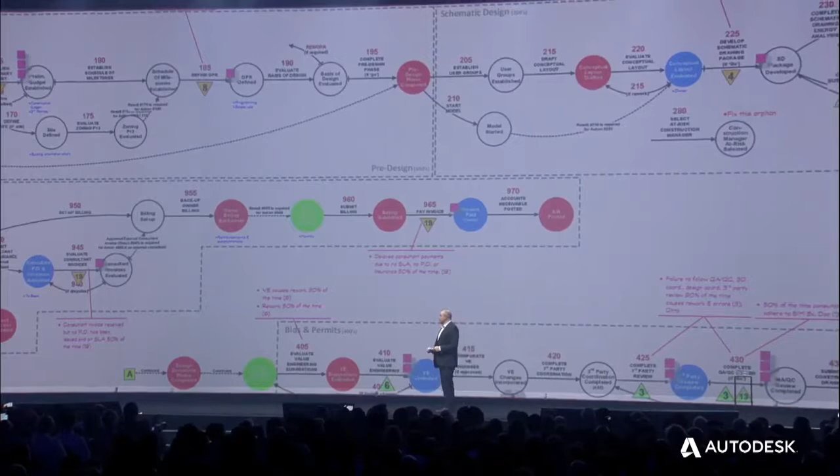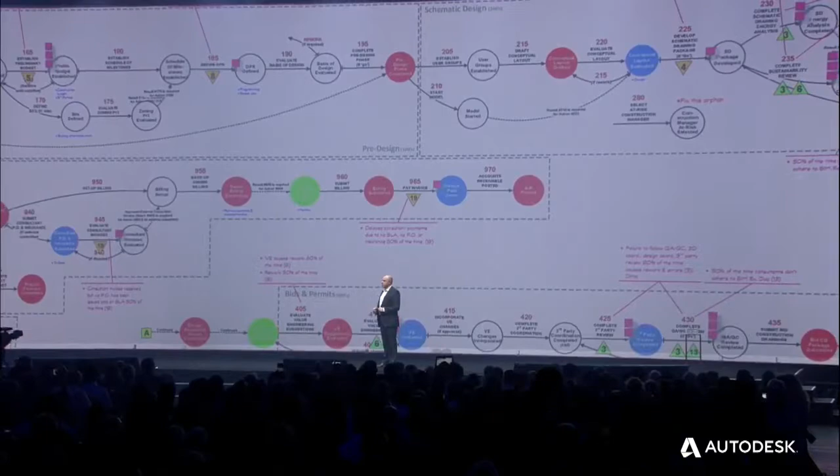Why is that? When you look at the process to deliver a complete project, it's no surprise. Come on, look at that, right? Our friends at the Beck Group took time to illustrate just how fragmented and complex it is. So how can we possibly create more and do it better when we are managing so much complexity? An app for that is not going to help. Software that fixes one piece of the process at a time is not the solution.

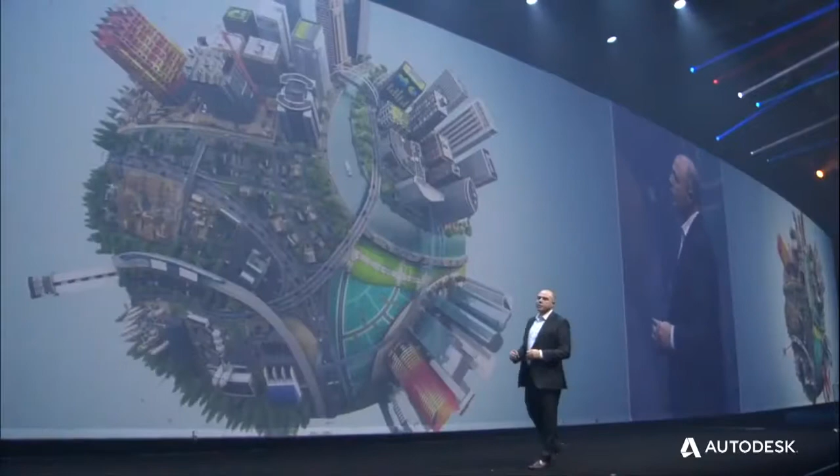The benefit of automation relies on connecting the data, the people, and the processes. Data has always been central to the promise of BIM. We hear you when you say that you want to work in more connected ways across teams and time zones.

When you add the power of the cloud to BIM, that changes everything. Connected BIM is BIM plus the power of the cloud. Let me say it again, it's important: Connected BIM is BIM plus the power of the cloud. And as Amy Bunzel said yesterday, we are working with you to put data at the center and help you connect the digital and physical aspects of your projects.

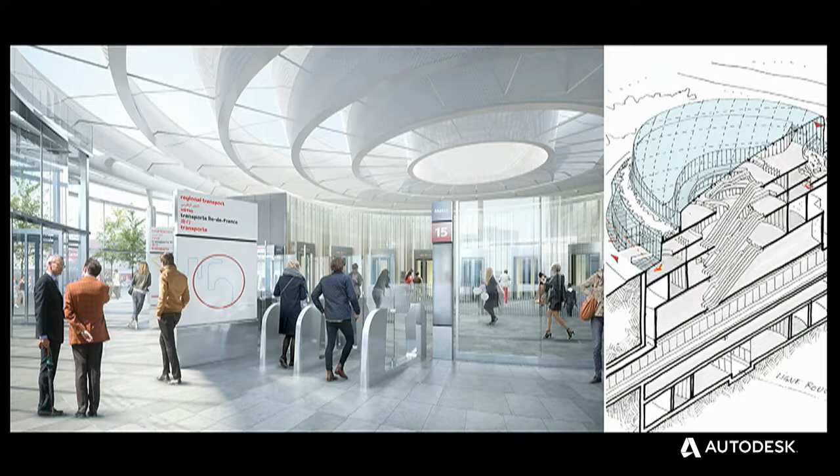I want to share with you 2 brief examples of how your colleagues are using BIM in more connected ways. The Grand Paris Express project is one of the largest infrastructure projects in the world. It will create 200 kilometers of new railway network with 68 new train stations, and 90% of it will be underground. It's one of the first infrastructure projects of this scale to use BIM from start to finish.

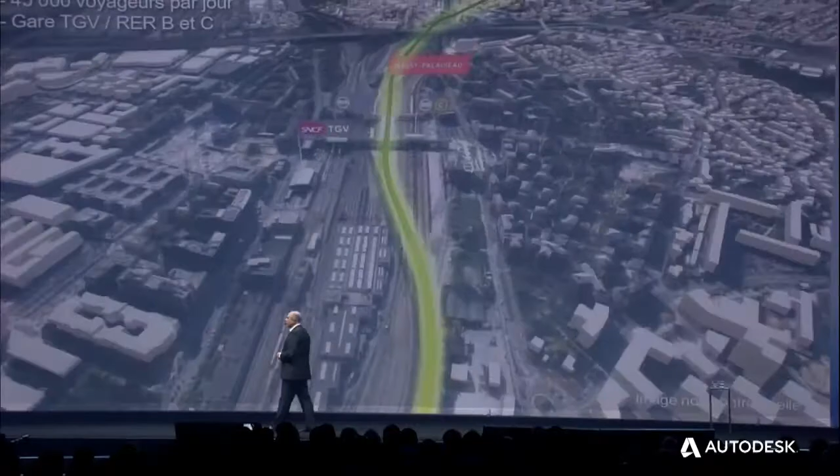37 architectural and civil engineering design firms are participating in the project, and they are all producing horizontal and vertical infrastructure BIM models together using Civil 3D and Revit. They optimize their design by simulating things like smoke extraction, escape routes, and optimal equipment locations. Better collaboration across all stakeholders is keeping the project on time and on budget.

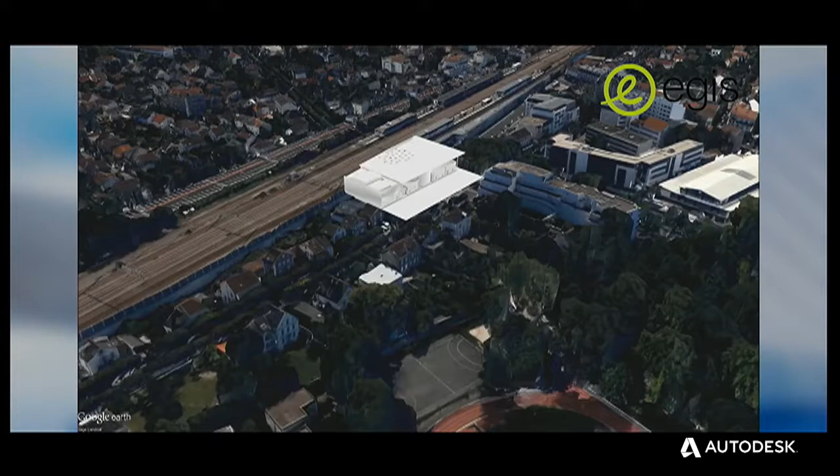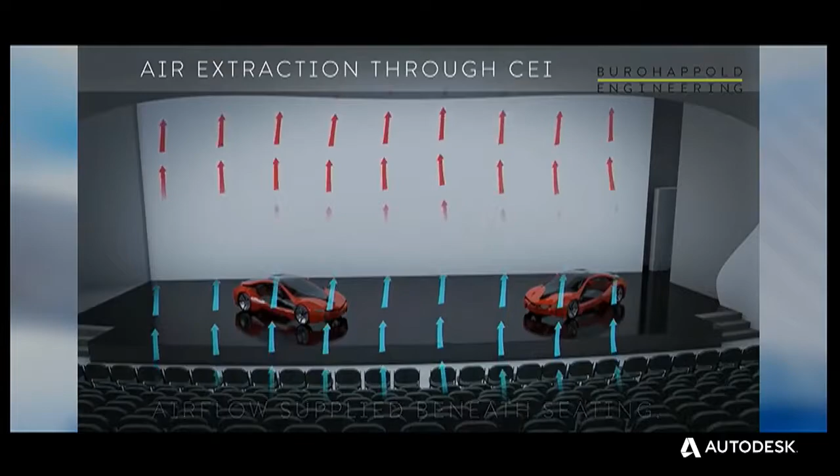Or take this amazing building in Dubai, the Museum of the Future, which is integrating digital design and construction to push the boundaries of what's possible. They actually won the first prize of the AEC Excellence Awards this week. It's an amazing project. They are using fully developed digital workflows across the project lifecycle to support the LEED Platinum objective, and they are using cloud-based tool technologies for energy, solar, daylight, and ventilation analysis.

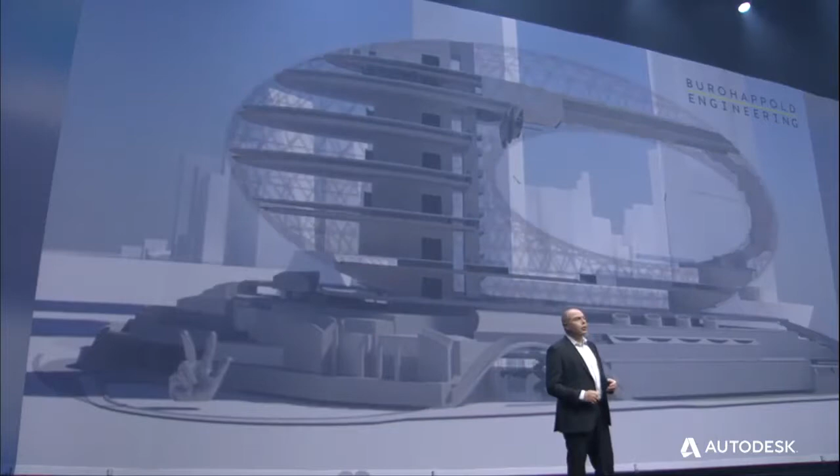In addition, with design for construction built in the Revit-based handover process, plus the use of BIM 360 Field in the field, a 65% reduction in rework is projected. 65%.

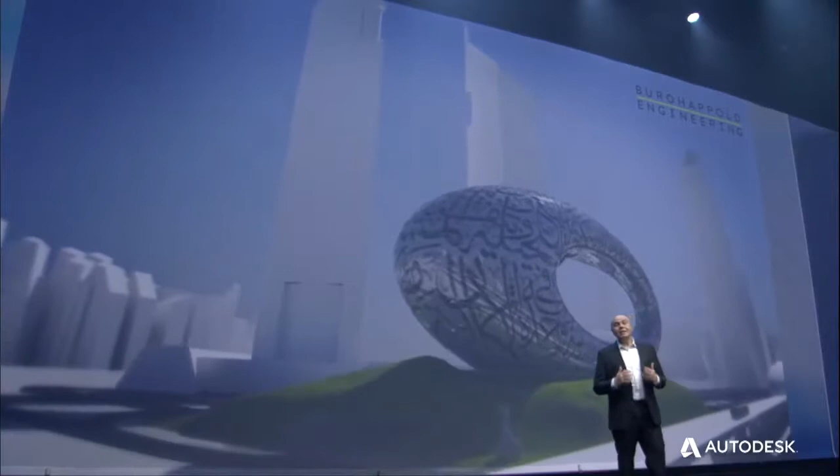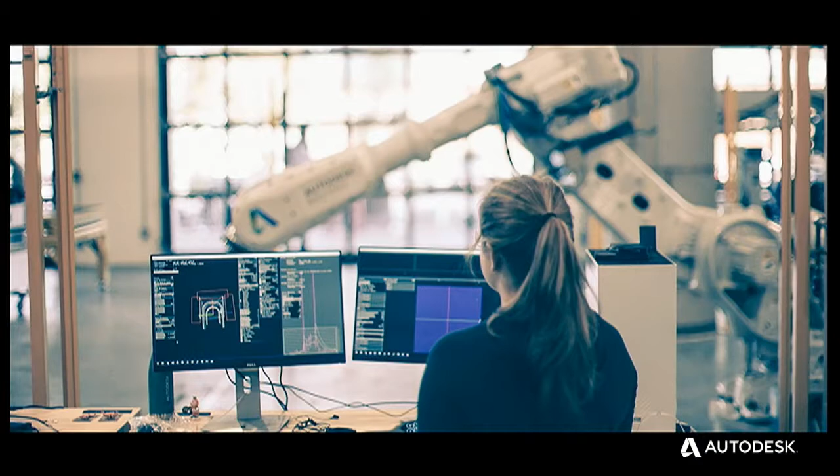So what's next? How does data enable us to work smarter? Remember, data feeds automation in ways such as machine learning and artificial intelligence. Automation augments our human capabilities. It is changing the way we work, and there is so much we can do. It's worth repeating: we can do more and achieve better results with less negative impact.

Take generative design as an example. You describe the optimal outcome, and the computer explores thousands of potential solutions for you.

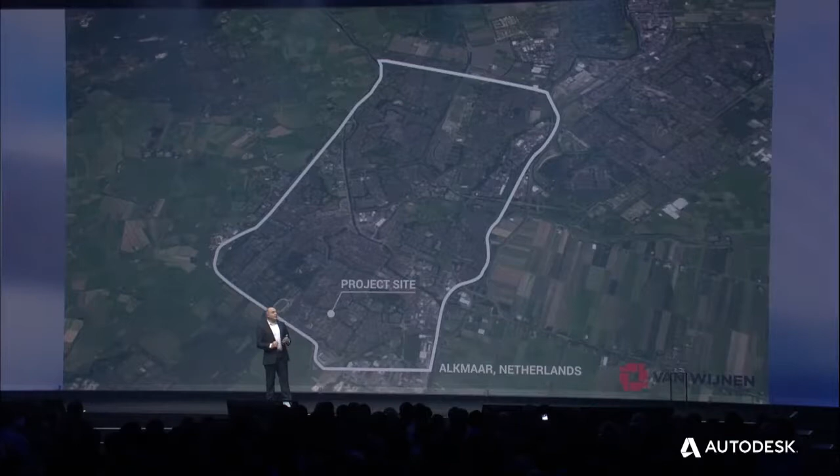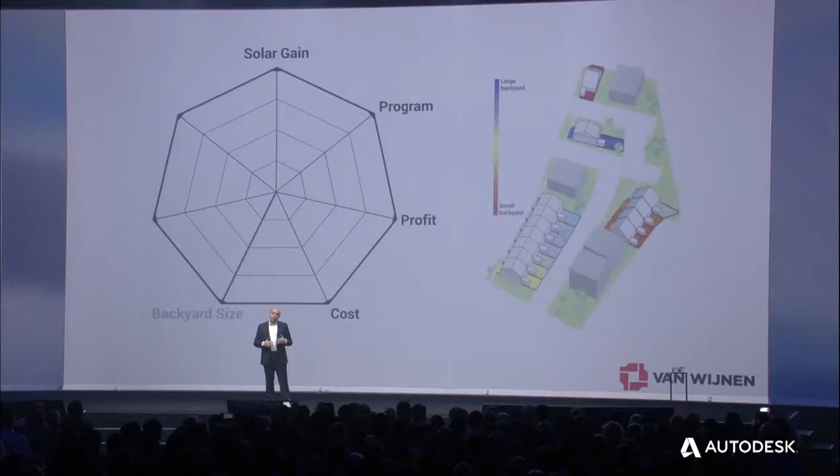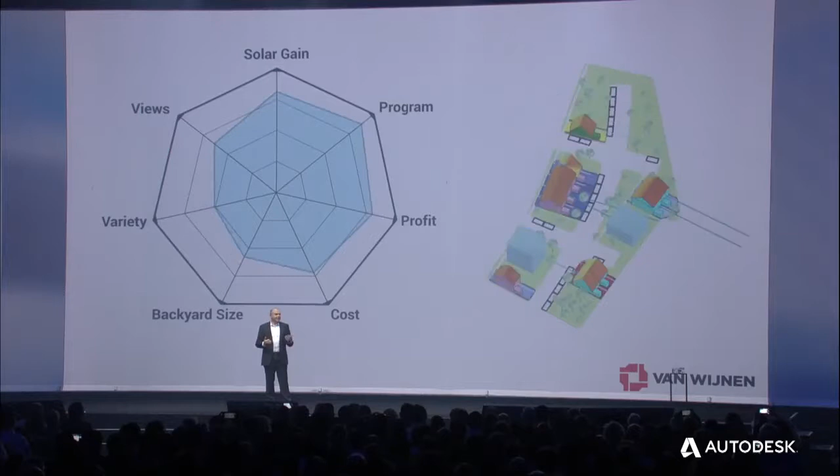On Tuesday, Hilbrand Katsma from Van Wijnen talked about this. Their land development example looked at an urban neighborhood and set performance criteria like backyard size, sunlight access, and views. They also set business criteria for the land developer like cost of development, quality, and time to market. Then the software went to work, testing and learning from each iteration what works and what doesn't, in order to come up with several options that provide the optimal solution.

In this real-world project example, Van Wijnen leveraged generative design to help them build more housing, at the same time meeting their own business objectives.

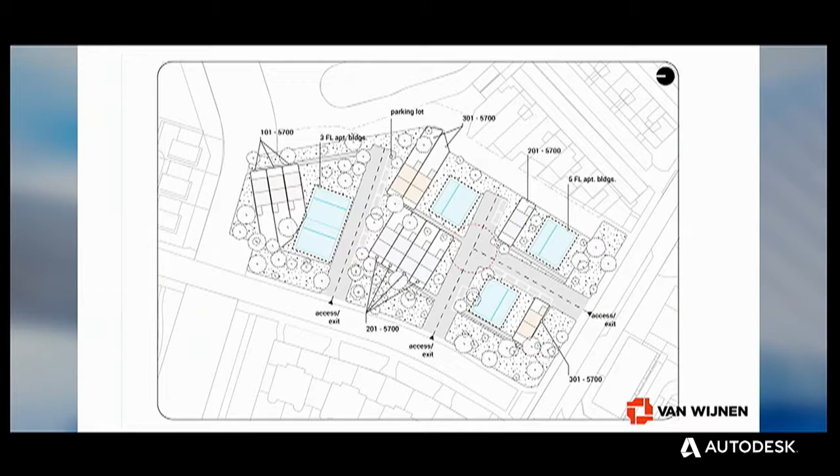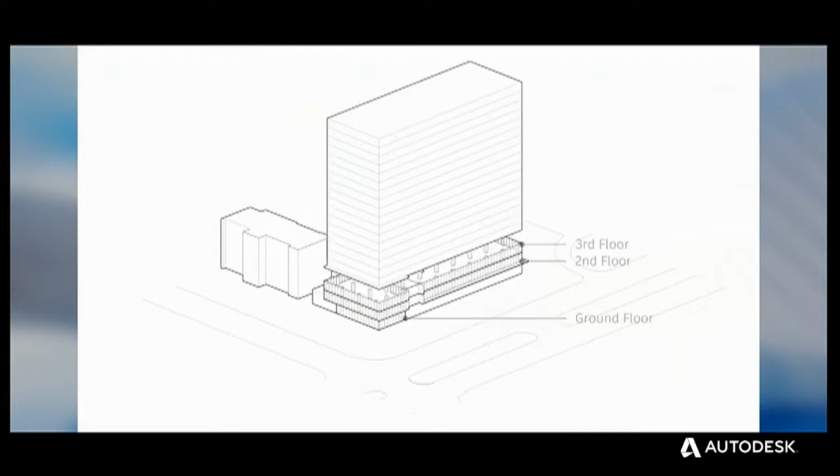At Autodesk, we tested the application of generative design to help us better optimize space in our Toronto office renovation. We surveyed our employees about their preference for collaboration space, lighting, acoustics, and distance to the kitchen, and sometimes distance to the bathroom.

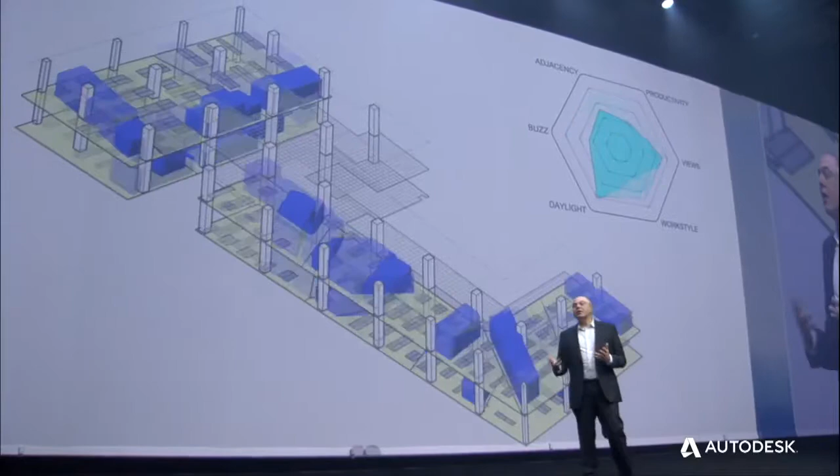Then we fed that criteria into the artificial intelligence software. You can see the process running as different floor plan layouts are being created. With this type of automation, infinite compute power augments our ability to design a better space to the delight of our employees.

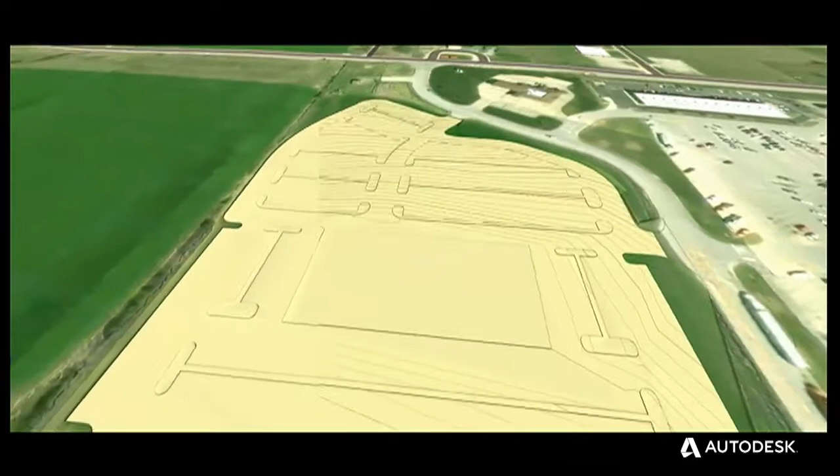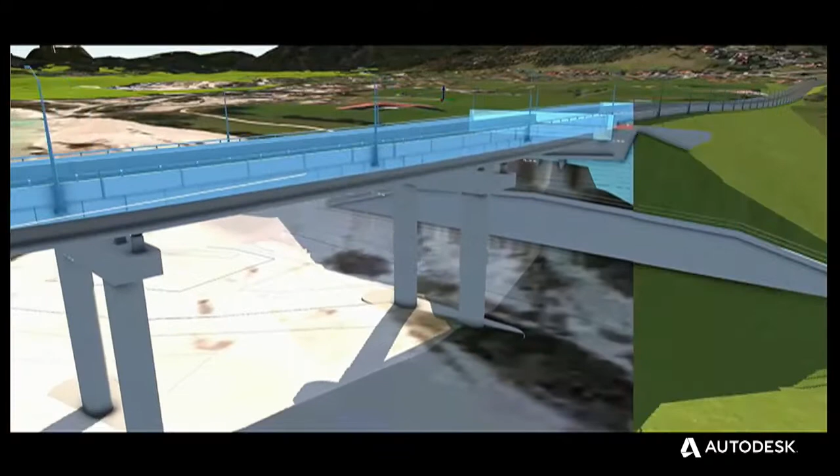We can also apply generative design to civil engineering. Grading on infrastructure projects can be complicated and require many time-consuming tries to achieve the best results. By analyzing the shape of existing ground and applying geometric constraints, hundreds or even thousands of solutions can be tested without even breaking ground. This is an example of how generative design can support low-impact development, so we have a less negative impact on the environment. I wish I had that when I was practicing civil engineering.

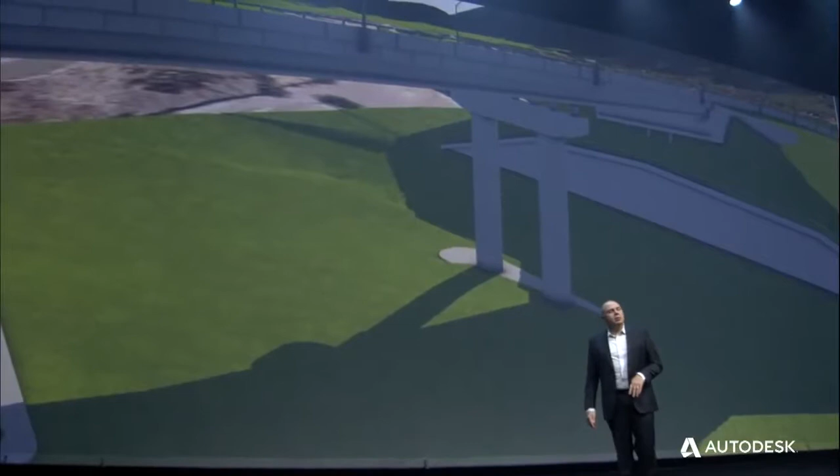All of these examples take place before construction starts. So how can machine learning help us on the construction site? Ask any contractor what their number one concern is, and it is always safety. Connecting machine learning, the Internet of Things, and BIM-based analytics are helping contractors to address safety concerns.

Construction sites are generating more photo and video data than ever before. Smartphones, tablets, site cameras, and even drones continue the explosion of visual content. SmartVid is using machine learning to turn this visual content into an opportunity to improve safety.

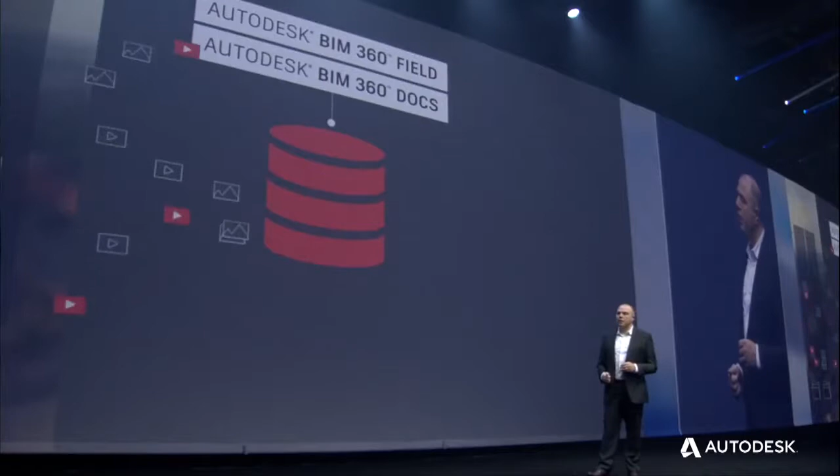In less than 90 seconds, you can connect your project data from BIM 360 Field and BIM 360 Docs and start mining it for safety insight, like, for instance, flagging missing personal safety equipment. You can use the results to reinforce safety protocols during your daily project meetings on site.

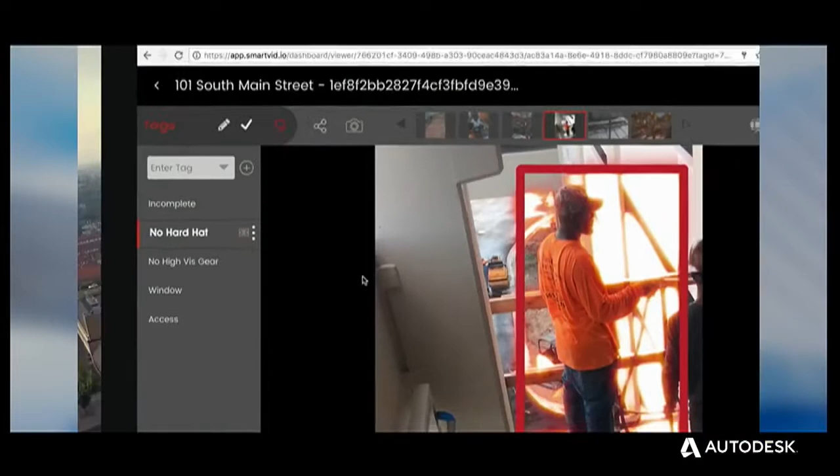We see SmartVid as the future of construction, and we recently invested in them so that they can accelerate this kind of innovation.

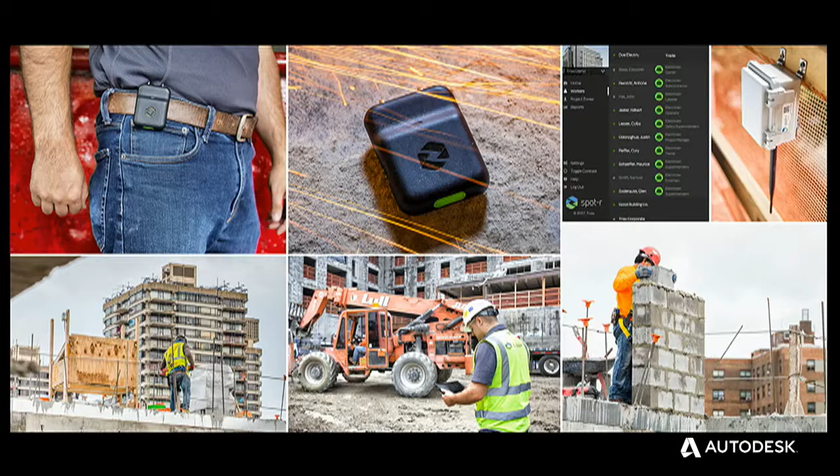Here's another example. The Internet of Things is helping contractors to build more safely than ever before. Autodesk is partnering with Triax Technologies to address safety challenges on site with wearable sensors that collect and transmit workforce and safety information in real time.

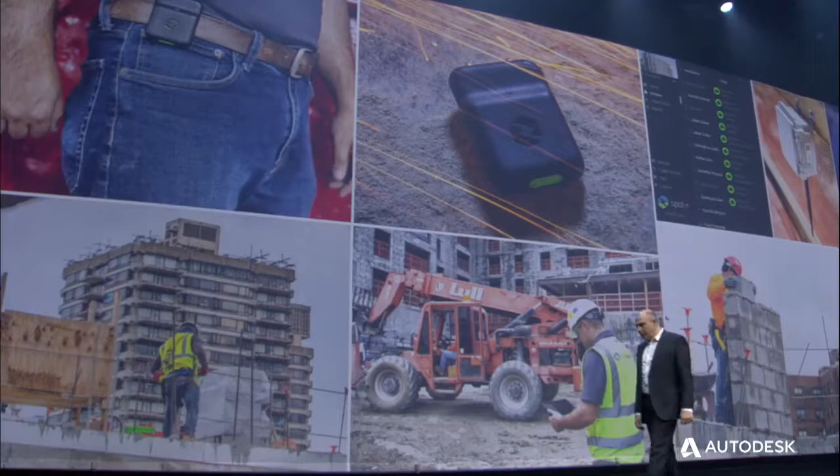If a worker slips, trips, or falls on the job site, sensors detect the incident and send an automatic alert to site personnel. The notification tells you who, when, where, and how the incident occurred, resulting in faster and better response to injuries.

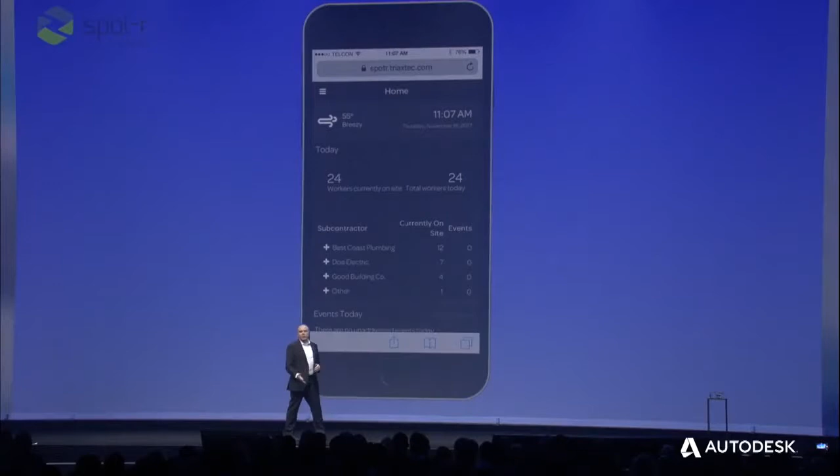And what if a site needs to be suddenly evacuated? In their product Spot-r, an evacuation alarm is triggered, and supervisors can track evacuation progress in real time.

Now, consider the potential of this workflow in the context of a Revit model that's hosted in the cloud. BIM visualization could help supervisors in locating precisely workers who've had an accident.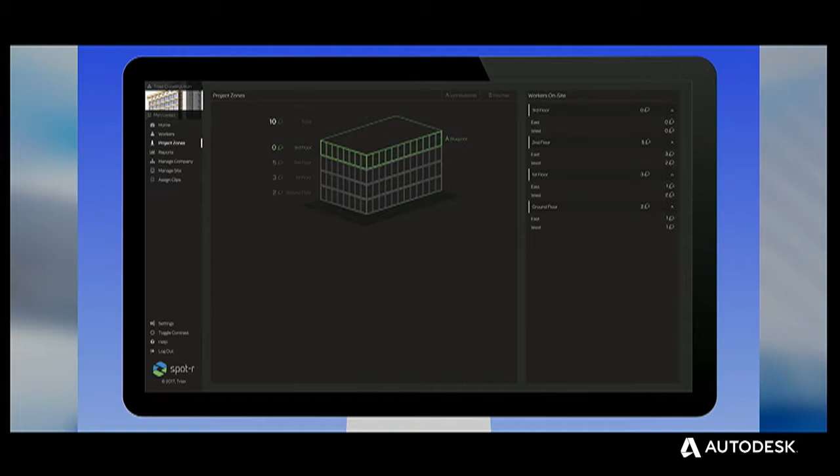We've said it, the value of the data is in the connection. What if we could take data coming from multiple sources like sensors, cameras, IoT devices, or any place across the project and visualize them against the palette of a building information model? Think about it. We would be able to derive even more powerful insight to improve quality, safety, and efficiency.

Think about Dasher 360 for IoT data visualization in real time.

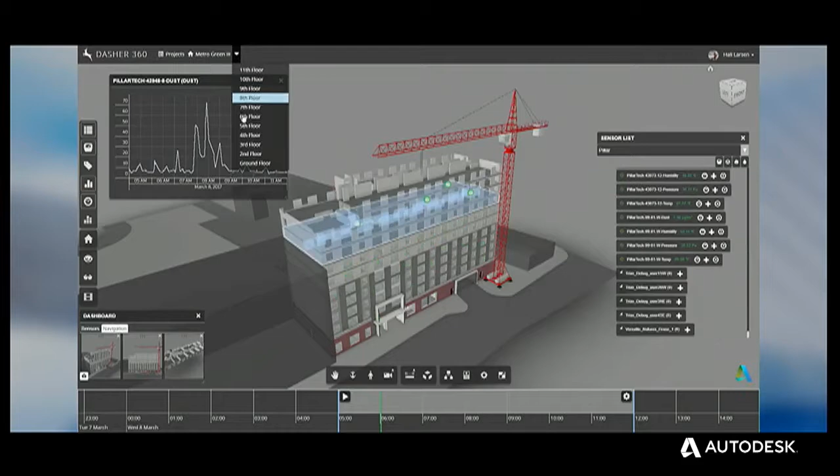Pillar Technologies is also working on ways to detect problems on the site. For instance, identifying humidity issues, which could over time lead to mold growth, or helping to limit worker exposure to harmful materials, including high concentration of airborne particulates.

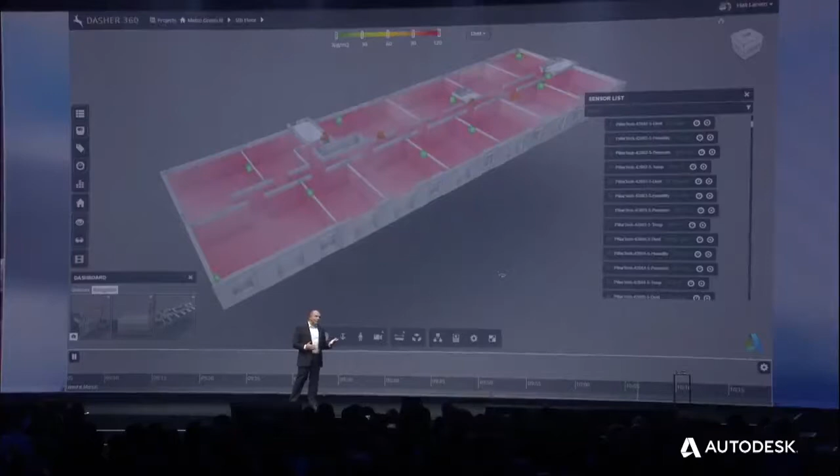In this visualization of the data, you can better understand safe versus unsafe zones at different times of the day and run historical reports to understand these changing conditions.

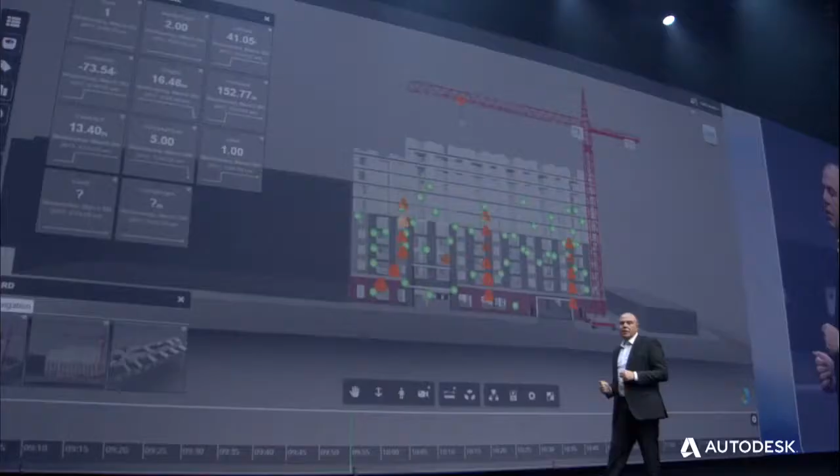Now, add the data from Triax, and you can see workers who've had a fall event or responded to unsafe conditions, resulting in worker evacuation. And take a look at this from versatile natures. We can visualize sensors from cranes to better understand loads and safe zones for workers.

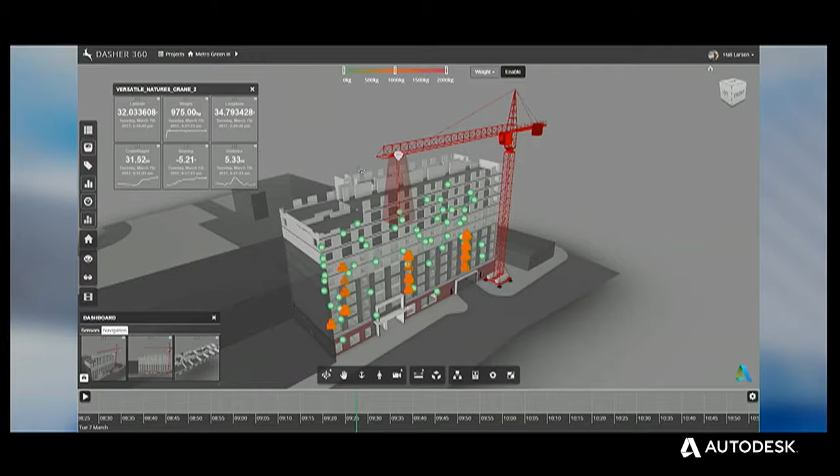It's incredible what is possible when combining BIM with the power of the cloud and connected devices. Don't you think?

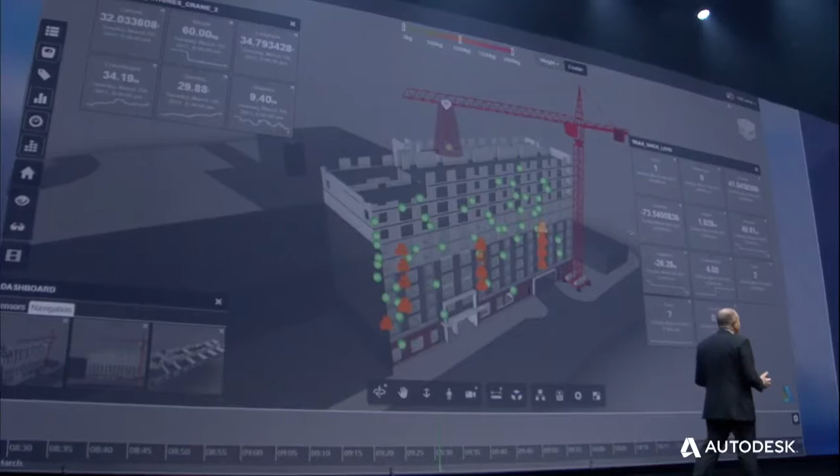In this case, it's a single environment to visualize IoT data from the construction site in real time.

Your potential is limitless. The amount of data that you will be able to create, capture, and compute will continue to grow. Our goal is to make that data more useful to you, provide better insight, and make it more valuable in running your projects.

So how are we doing that? Our development efforts are focused on delivering more connected ways of working. We are building platforms, APIs, and workflows that help you connect to the data and the people and the processes, no matter who you are, what you do, or what you are on the project.

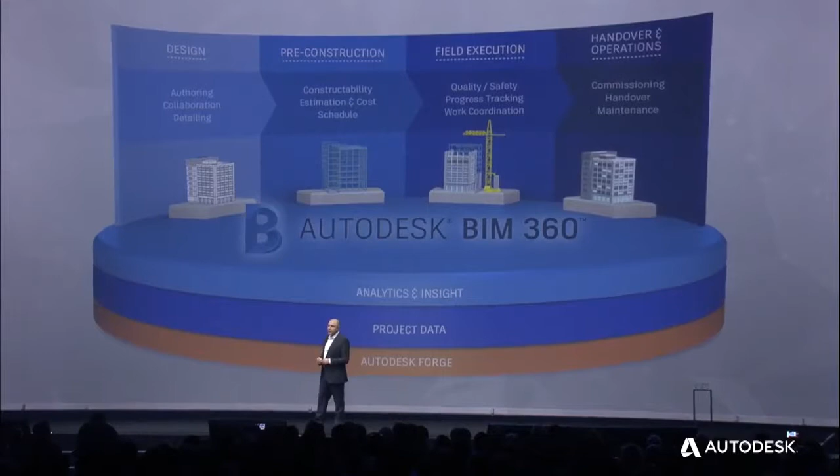Autodesk continues to build a common data platform across A, E, and C, beginning with construction and extending upstream to design collaboration and downstream into operations and maintenance. That platform is BIM 360. And it is the way in which we are connecting you to the compute power, data, and insight that you need to create more and better, waste less, and build a better world.